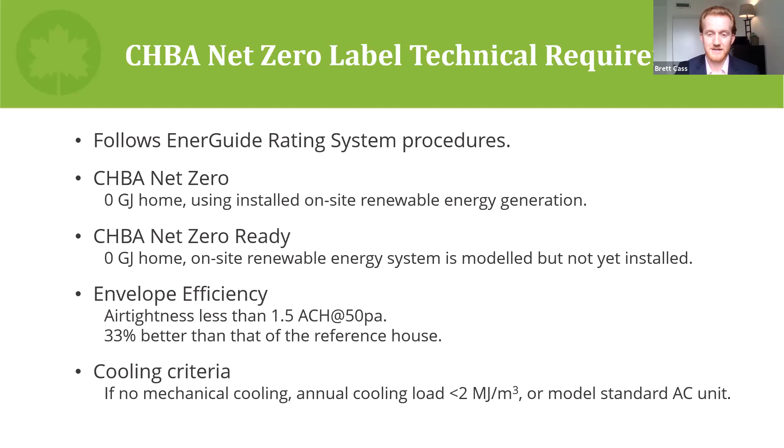First, starting with the code targets for envelope improvement. This target represents the heat loss through the envelope via conduction, air leakage, and ventilation. It needs to be less than that of a reference house set out for each tier. There is no envelope target at tier 1. Note that this envelope metric is a little different than the net zero approach, as mentioned.

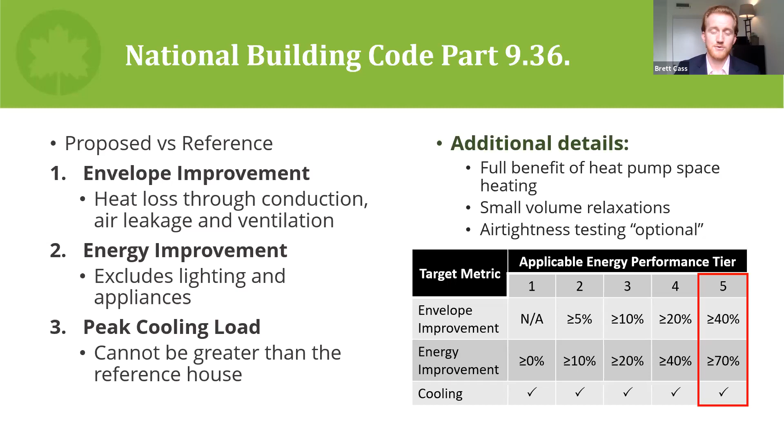The HOT 2000 files submitted for CHBA net zero labeling use a different set of assumptions than those required for the tier code. We needed to run the homes using the proposed code assumptions so that we could accurately understand how net zero and net zero ready labeled homes would have performed. To do this, NRCan's Office of Energy Efficiency and CanMet Energy staff kindly assisted us by using their housing technology assessment platform, known as HTAP, to automate this process for 447 net zero or net zero ready labeled homes. The photovoltaic panels used to go from net zero ready to full net zero were not included in this analysis because the code does not consider them. With the PV removed, these homes are effectively net zero ready, so we'll refer to them as such throughout this presentation. The results were shared with Liz and I, and we used the data to perform the analysis that follows.

So Liz will tell us more about this analysis. Thanks, Brett. Here's the headline. When comparing CHBA net zero ready homes' performance levels to the current proposed NBC, only 9% of homes assessed met all three of the proposed tier 5 requirements. 44% met no tier at all. As we pointed out earlier, tier 5 was intended to align with net zero energy ready, so this might be a bit surprising. Let's have a look at each requirement individually.

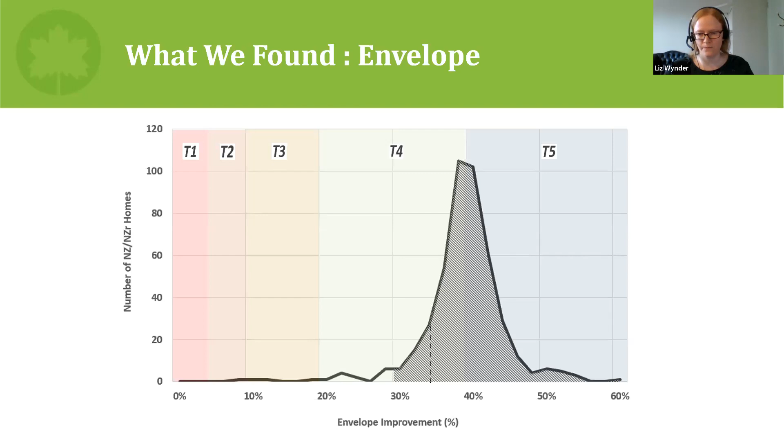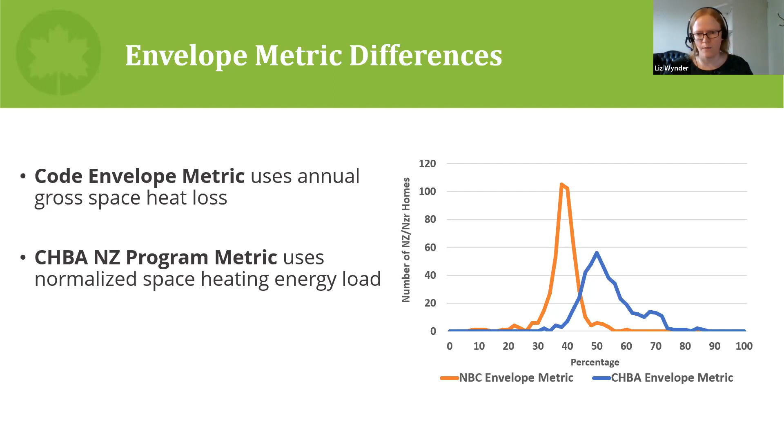Let's move on now to the energy improvement. Here again, we are comparing the CHBA Net Zero Ready Homes performance levels to the currently proposed NBC, now looking at the energy improvement targets only. We can see that nearly 3/4 of the net zero ready homes do not meet the Tier 5 targets of 70% improvement over reference. Before we draw conclusions, let's again look at the data in more detail.

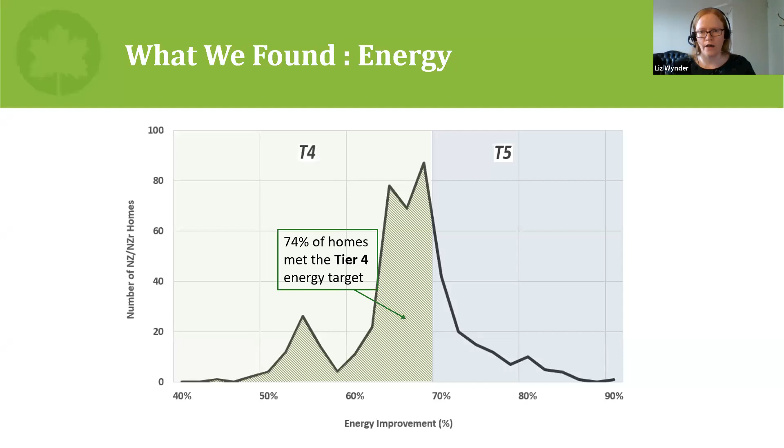You can see that 74% of the homes met the Tier 4 energy target, and that 26% of the homes met the Tier 5 energy target. There was also an interesting collection of data around 50 to 60% improvement. This is dominated by homes built by one builder, which suggests that an effective means of meeting net zero has been found, which allows a greater proportion of energy to be offset by PV.

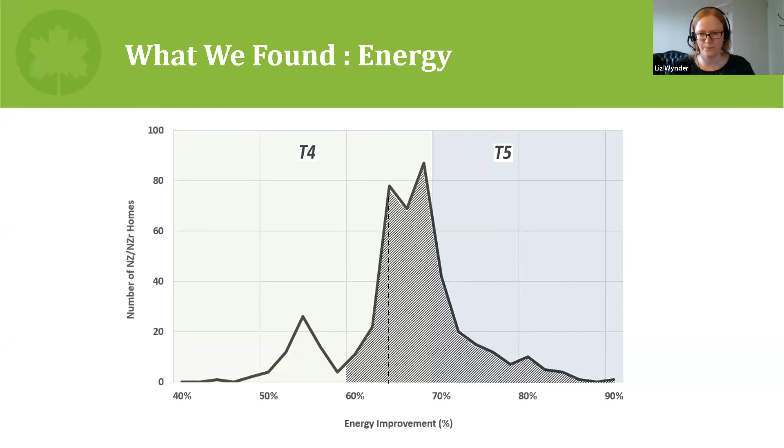In the Net Zero programme, the cooling requirements do not apply if air conditioning is provided. That is not the case with the tier code criteria. Remember, our net zero builders were not trying to meet this requirement when building their homes, and they may be able to meet it in future homes with some changes to the strategy. Let's see how close the homes were.

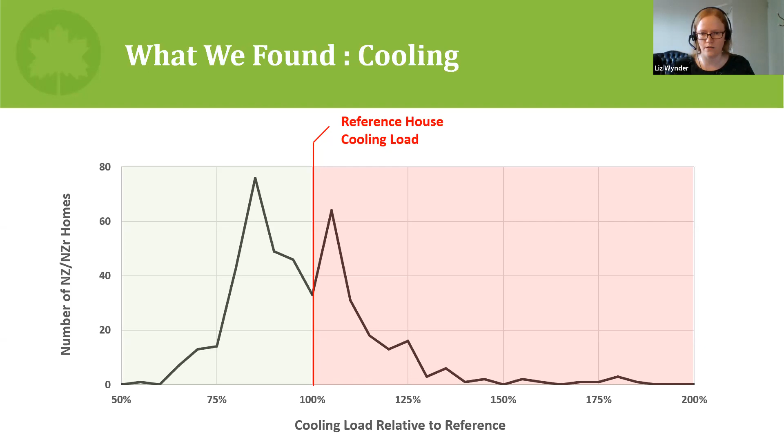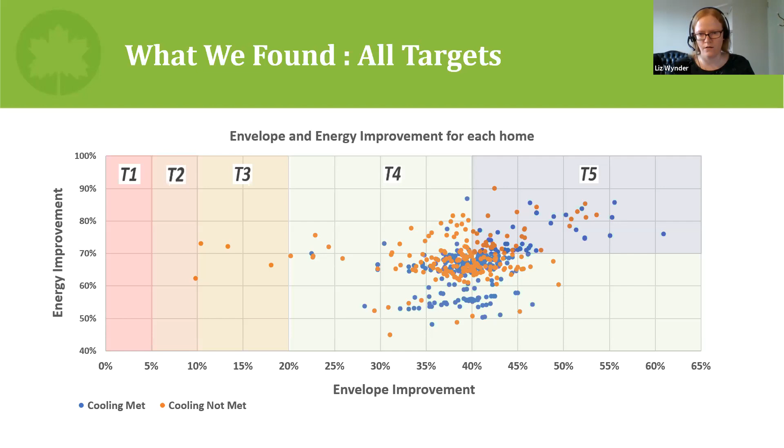Envelope improvement is quite variable within a given builder's data when compared to energy, which may be due to variations in air tightness and form. There still seem to be a lot of this group failing the cooling requirement. We'll come back to that later.

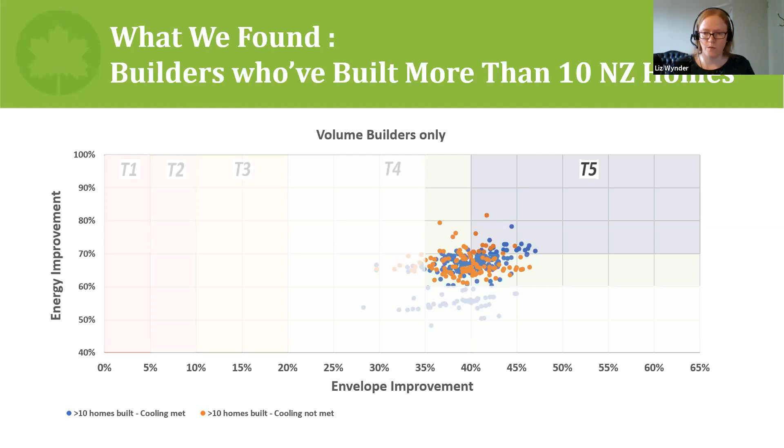We wanted to see how representative these builders were of more typical home construction in Canada. Here, we looked at the typical size and type of house being built in this reduced sample. As you can see, most were between 400 and 1100 meters cubed. 65% of the homes were single-family detached, with the remaining 35% made up of a good spread of attached house types.

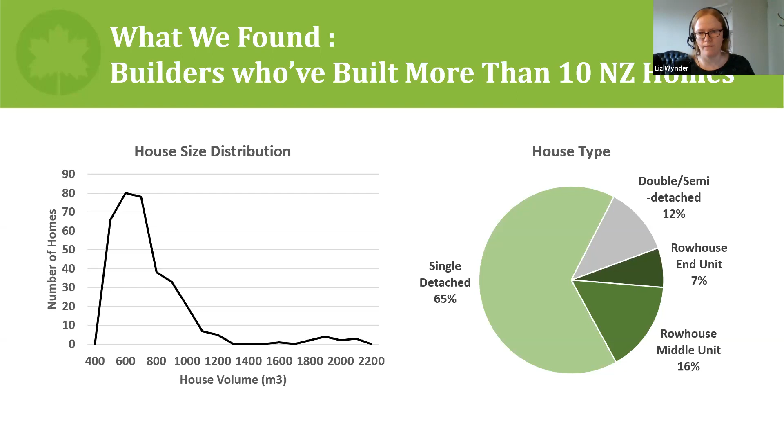Last month, we sent out an optional survey to our qualified net zero builders and renovators, as well as our Net Zero Council builder and renovator members. Among other topics, we wanted to hear their views on this data. Brett will take us through the survey results on the tier code aspect.

So the survey was fairly technical and focused on a handful of aspects that both the CHBA Net Zero Home Labeling team and the CHBA's TRC, the Technical Research Committee team, were interested in hearing from our net zero builders about. In this analysis, we'll look at the responses from these builders. The survey was completed online and the builders did not see the entire data analysis from this presentation in long form, although they did receive a description of each chart before providing a response to a directed question. The builders were surveyed on their opinions of the 4 charts above, the same charts that we reviewed earlier.

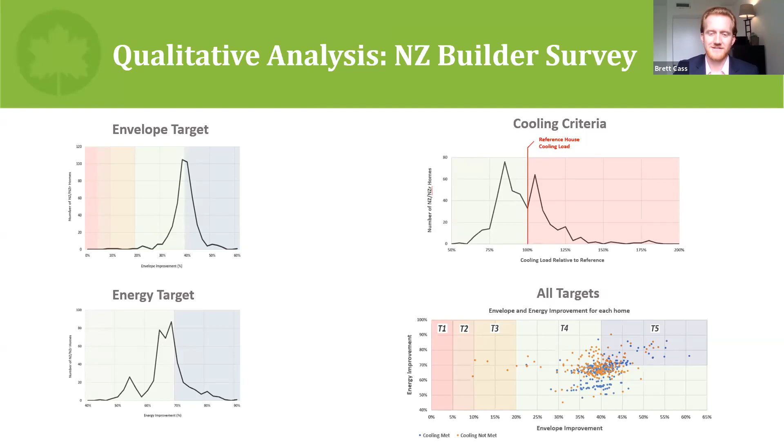So what was the makeup of this group of builders? Well, 25 of the 27 respondents are qualified net zero builders or renovators. The 2 that answered no are working to become qualified. The builders represent 7 provinces from across Canada, with the majority coming from Ontario, British Columbia, and Alberta. This comes as no surprise to us as it aligns well with where our net zero homes are typically built. It's important to remember as we look at these results that this survey sample group is not representative of the general builder membership or industry at large across Canada. This is a sample of the industry leaders who have experience in net zero residential construction.

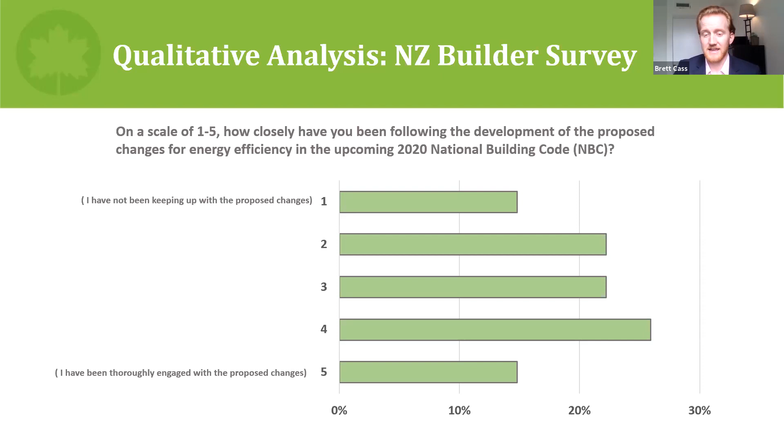We also wanted to see what level of knowledge these builders have with respect to the ongoing development of the code tiers in the 2020 NBC. We know that some of the builders are very involved, whereas others are not, and we wanted to get a better understanding of the overall knowledge characteristics of our respondents. So we asked, on a scale of 1 to 5, how closely have you been following the development of the proposed changes for energy efficiency in the upcoming 2020 NBC, with 1 representing 'I have not been keeping up with the proposed changes,' and 5 representing 'I have been thoroughly engaged with the proposed changes.' As you can see, we saw quite a variety of responses here.

We then aimed to take a closer look at the opinions of each of the respondents on the individual metrics that make up each tier: envelope, energy, and cooling criterion, specifically looking at where their net zero ready experience lies with tier 5. We started with the code envelope chart that we looked at earlier in this presentation.

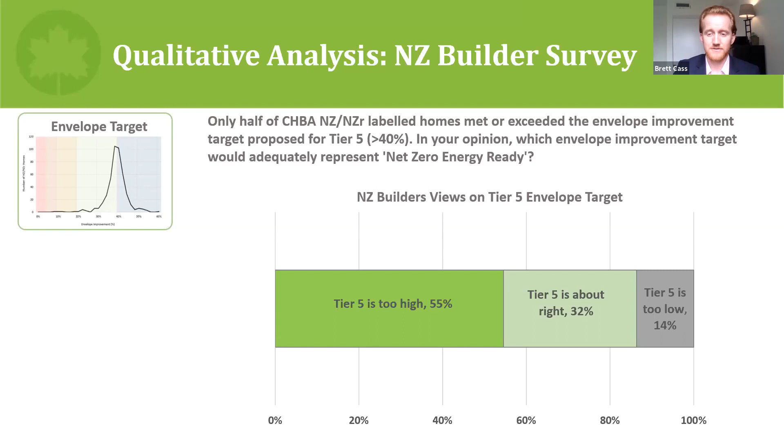The respondents viewed the chart with a brief description and were then asked: only half of the CHBA net zero and net zero ready labeled homes met or exceeded the envelope improvement target proposed for tier 5, which is greater than 40%. In your opinion, which envelope improvement target would adequately represent net zero energy ready? We see that many respondents view the proposed tier 5 code envelope percentage improvement as being too high. Some felt that it was about right, and a few did feel it was a little too low.

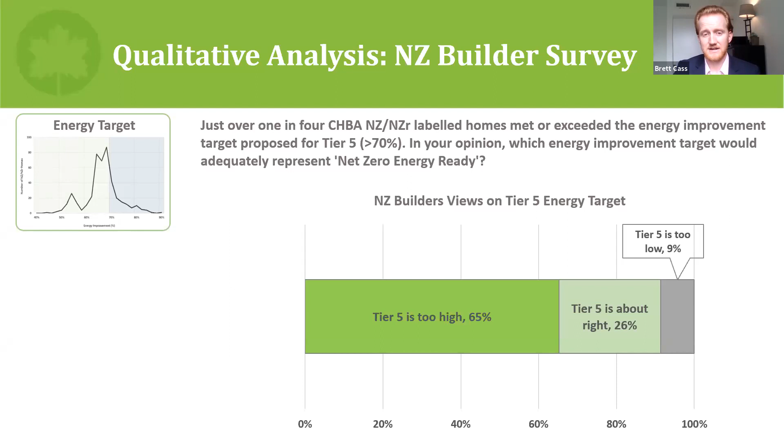Lastly, we gathered opinions from the builders on the cooling criteria. They viewed that chart that we analyzed earlier in this presentation, and we asked them this question. It is possible for a home with a large absolute peak cooling load to pass because it is slightly less than its reference house, and a home with a low absolute peak cooling load to fail because it is slightly higher than its reference house. Many CHBA net zero and net zero ready labeled homes do not meet this criteria.

Do you feel that this cooling criteria should be? The available answers for them were: relaxed to allow a higher cooling load, remain as currently proposed, tightened to require an even lower cooling load, take a totally different approach, or lastly, be removed altogether.

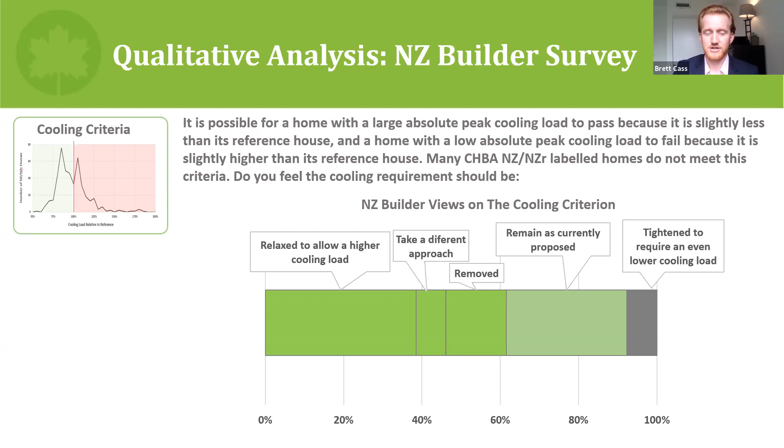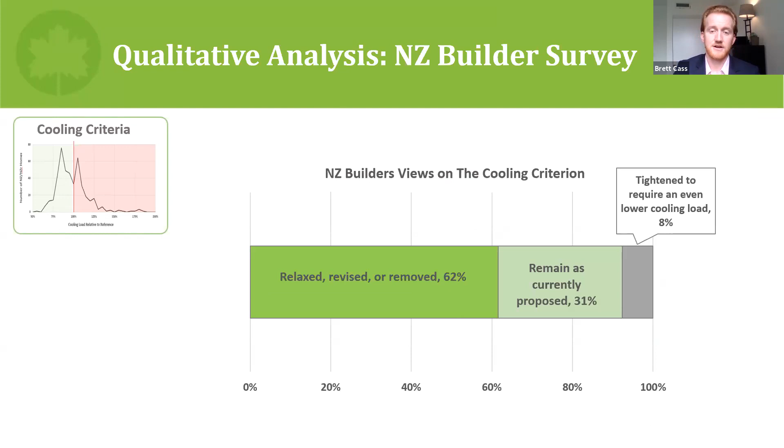Here, for simplicity, with the same chart, I brought all 3 of those groups together to show that 62% of respondents feel that the cooling criteria should be either relaxed, revised, or removed. In comparison, 30% of participants felt it was about right, and 8% of participants thought it could be tightened even to be a little more stringent.

Before we highlight these findings, let's remember that these are the views of the net zero builders who have experience building high performance net zero homes. The views of the general CHBA membership may be even stronger.

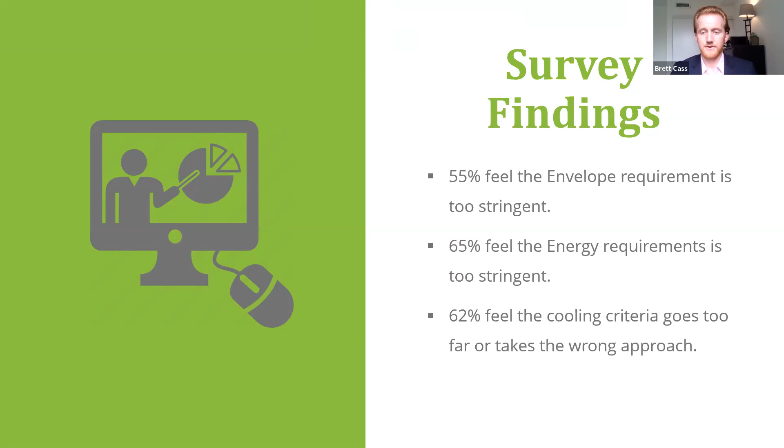55% of net zero builders feel the code envelope requirement for tier 5 is too stringent. 65% of the net zero builders feel the code energy requirement for tier 5 is too stringent. 62% of net zero builders feel the cooling criteria goes too far or takes the wrong approach.

We don't want to just identify a problem without offering options for moving forward. So we've taken a look at some areas in more detail.

Based on the data we have presented, it seems reasonable to conclude that the current tier 5 requirements are not a close match to CHBA net zero ready homes. These homes provide the best available data to determine what net zero ready performance looks like in terms of the code metrics. There appears to be something of a sweet spot in energy and envelope performance slightly below the current tier 5 target, which is a common strategy for builders to get to net zero ready.

CHBA net zero builders, who are the industry leaders, agree that tier 5 goes too far and ought to align with CHBA's net zero ready labeling program. So, where should the tier 5 requirements move to? Deciding what proportion of net zero ready homes should meet tier 5 for it to be considered representative is quite subjective, but most people would probably agree that it should be more than 9%.

If we relaxed each of the 3 requirements a little, that compliant proportion would increase. The table shows the current Tier 5 requirements and 3 combinations of relaxed requirements. The right column shows what proportion of all the analysed net zero ready homes would comply with each option. For example, if you felt that over 60% meeting Tier 5 was enough, you might consider relaxing the envelope requirement to 30%, the energy requirement to 60%, and the cooling limit to no more than 10% over the reference house.

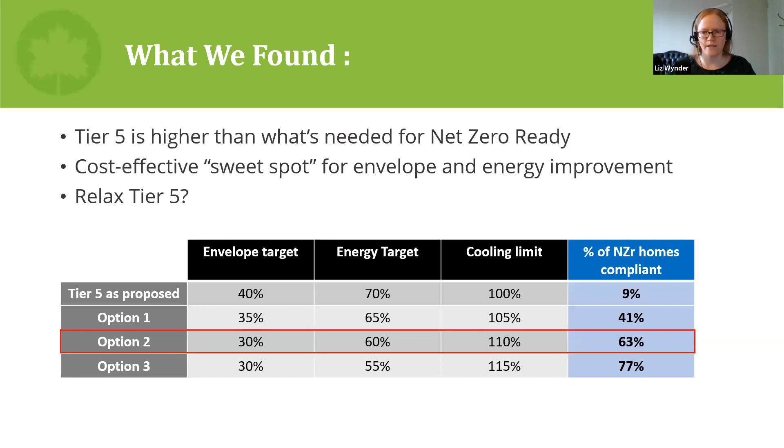As part of our survey, we asked our net zero builders about their experiences with overheating in their net zero ready homes. 24% indicated that one or more of their homes had some issue with overheating. Most net zero ready homes have air conditioning provided at sale and are unlikely to overheat. Although not a majority, it is clear that some overheating is occurring, and it would be helpful to have an effective means to limit the issues.

There is one aspect of the cooling requirement that may not be obvious, as mentioned in the survey question. These 4 sets of data represent 4 homes in the net zero data set. The 2 on the left, with relatively high cooling loads in blue, meet the cooling criteria by being lower than the reference house load in orange, while the 2 on the right, with relatively low cooling loads, fail because the reference cooling load is even lower.

Home 2 could have passed with a cooling load much higher, almost as high as Home 1, which is twice as big. Home 4 may have been able to meet the cooling load with an adjustment to the window to wall ratio or the solar heat gain coefficient, but that may not be the case for Home 3, which has a bigger difference. Home 3 is also more than twice the size of Home 4, but has only a slightly higher cooling limit. This seems to indicate that the proposed peak cooling criteria is counterproductive where the goal is energy efficiency. Whether a home passes or fails appears arbitrary and unrelated to energy efficiency.

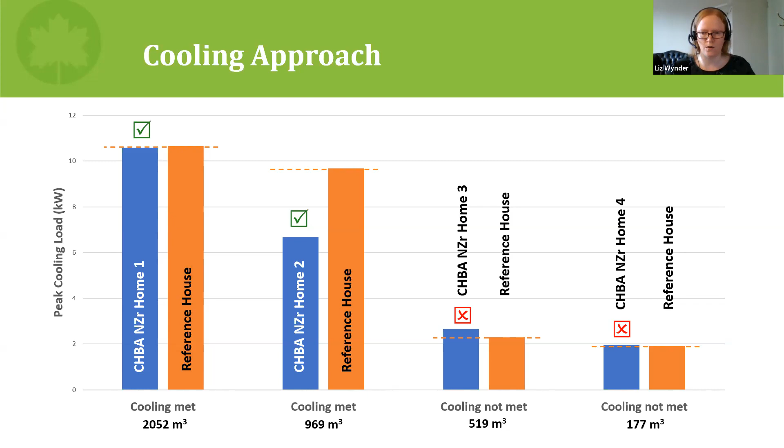This graph shows the distribution of peak cooling loads with the total load in kilowatts on the x-axis and the number of homes with that load on the y-axis. 63% of homes had peak cooling less than 4 kilowatts, but most homes were also less than 1,000 meters cubed, so this might not be a fair limit for homes bigger than that.

As you might expect, one of the main contributors to the cooling load is the volume of the house, so any absolute limit would be harder for larger homes to meet.

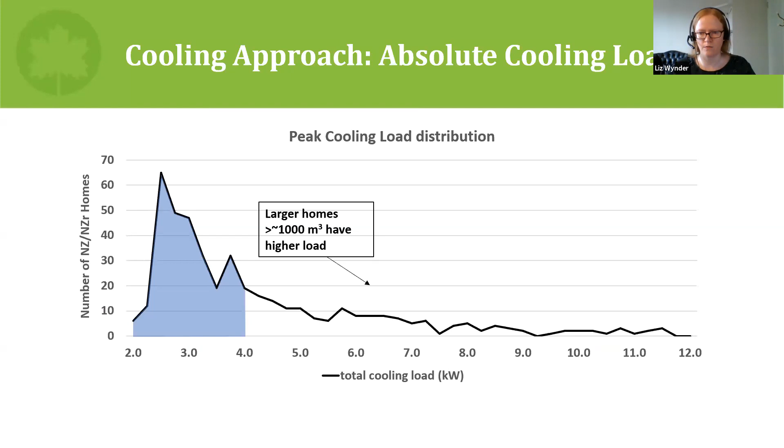Just for interest, we looked at how the distribution for the builders with over 10 net zero labels differed from this. The answer is not by much. This is not the same graph, it shows only the data for the builders with more than 10 labels, but it does look very similar.

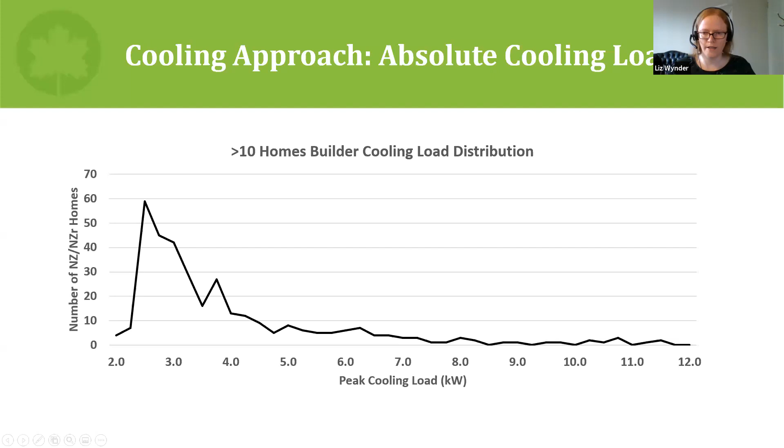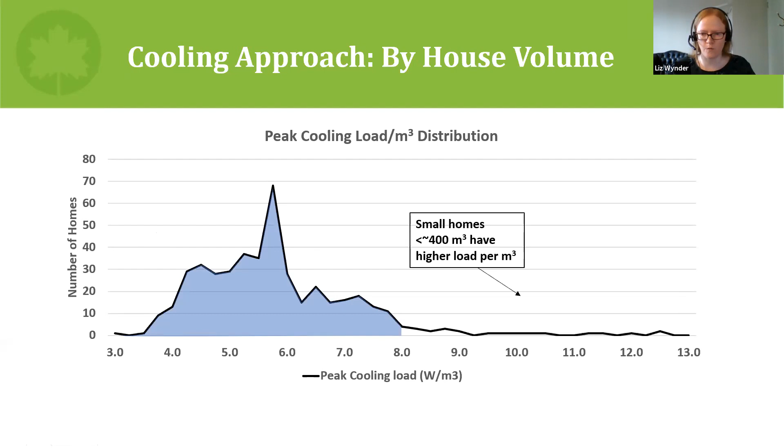Next, we tried normalizing by house volume to get the cooling required per meter cubed. This time, the line represents the number of homes with the same cooling load per unit volume in watts per meter cubed. This might seem like a reasonable way to limit overheating by setting a normalized target at, say, 8 watts per meter cubed. But at small volumes, the cooling load in our data stops decreasing linearly and levels off, so the normalized figure is bigger. This suggests that small homes may struggle to meet a per meter cubed cooling requirement.

In short, regulating cooling is complicated. The best option might be to accept homes meeting either of 2 targets, a total cooling load limit in kilowatts or a per volume target in watts per meter cubed or similar. A reference comparison may also have a place if the codes wish to accommodate houses with large glazed areas, which might otherwise struggle to meet these targets.

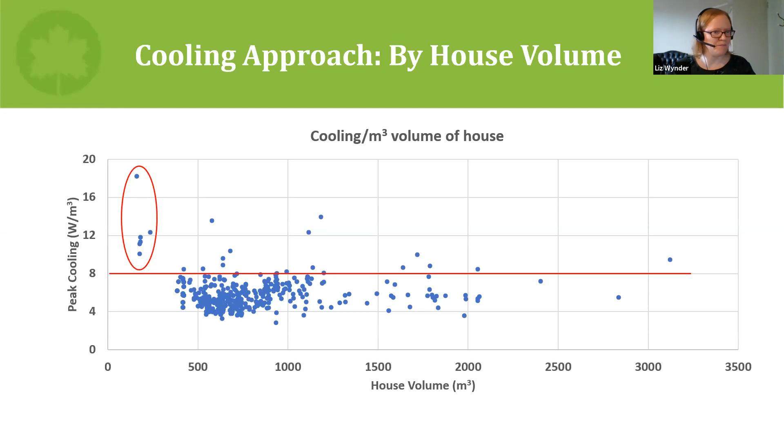With the information we've discussed so far, the major takeaways should fairly obviously be that, one, quantitatively, with respect to the data, net zero homes are not meeting tier 5, and two, qualitatively, with respect to the net zero builders survey, the industry leaders believe that tier 5 is too stringent.

With those takeaways in mind, we need to take a serious look at the cost effectiveness of tier 5. We know that discussing cost accurately is always tricky, so I'll reference a relatively straightforward cost optimization chart.

Over the past five years, through the CHBA Net Zero Home Labeling Program, builders have been leveraging this voluntary program to help the industry find the sweet spot to net zero performance.

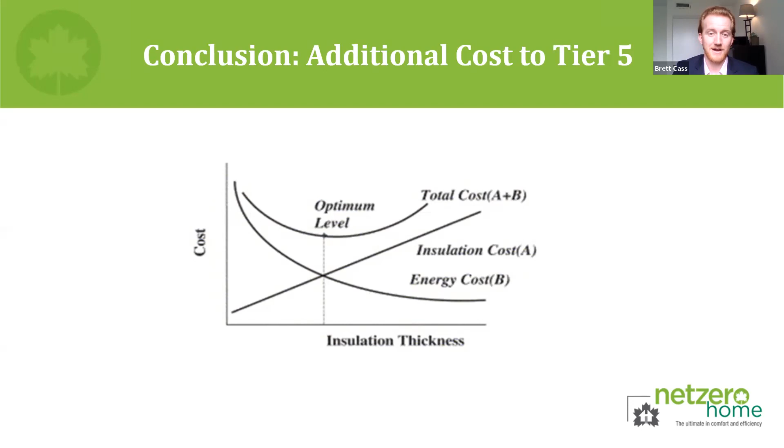So to sum it up, though tier 5 was originally conceived as an equivalent to net zero ready, that aim does not appear to have been achieved. Relaxing the target slightly would be much more representative of typical net zero ready homes and lead to more effective solutions. Many net zero homes do not meet the cooling criteria, but they do not widely experience overheating because most have air conditioning. The proposed cooling criteria may not be the best way to limit overheating.

Net zero builders, the industry leaders and innovators in energy efficiency, have indicated that tier 5 goes too far and should be revised to reflect the performance levels of homes in the net zero home labeling program. Voluntary energy efficiency programs have always played an important role in informing the path of the codes. We've seen a very consistent, and to my understanding intentional, pattern of the codes following behind the voluntary programs, allowing the voluntary programs to provide lessons learned and confidence in an approach before moving forward with code regulation.

If it is in fact still the goal of tier 5 to sit at net zero ready performance level, we should very strongly consider what the market has shown us before making these regulatory decisions.